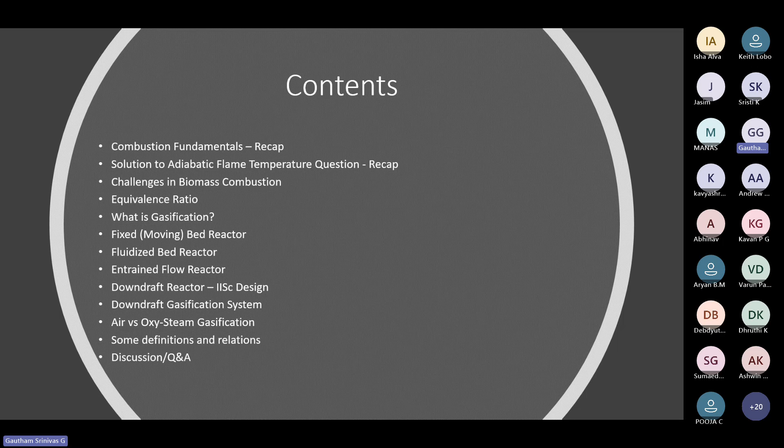And then there is a fixed bed downdraft reactor at IISc; we'll have a short intro to that one. Then the gasification system: the technology the reactor uses, and then the system. Then air gasification versus oxygen gasification, which I mentioned in passing when we saw the biomass conversion technologies and pathways. Then some definitions related to gasification, and then the discussion.

So for combustion, you need three major factors. One is the fuel or combustible substance. Then the oxidizer, which is air or oxygen; since air contains oxygen, air can be the oxidizer. And you need sufficient temperature for combustion to start and sustain. At room temperature you cannot have combustion, because each fuel has an ignition temperature, and you can start burning it only after reaching it.

So what is heating value? Heating value is the amount of heat or energy released when you burn any fuel. It can be determined through a device called a bomb calorimeter. There is an experiment for that; I didn't go into the details, you can look it up, also on YouTube. Heating value can be expressed as higher heating value or lower heating value. So what is the difference between the two? Anyone?

Sir, the water, H2O, that is released is either in gaseous form or liquid form. In higher heating value, we consider the water in liquid form, so the energy released by the water vapor converting back to the liquid state is also considered. In lower heating value, that part is not considered.

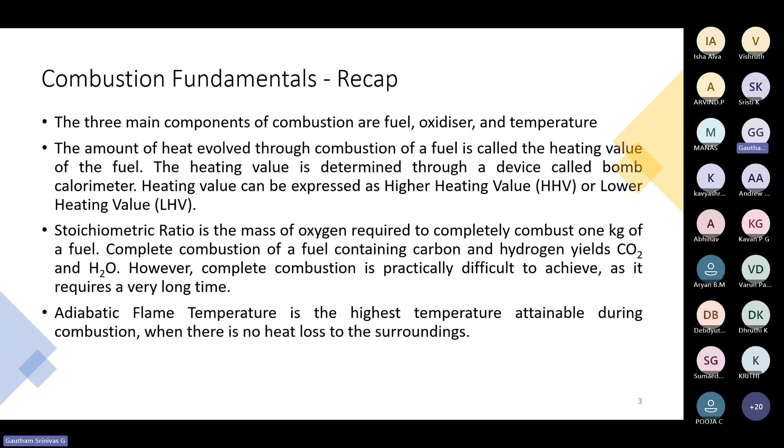Okay, so we'll come back to the problem from last week. So basically, we had considered only oxygen as the oxidizer. CH4 plus 2O2 gives CO2 plus 2H2O is what we had considered. That is okay if pure oxygen is the oxidizer, but in reality we will use air for the combustion. Air will contain nitrogen. So we'll see how to calculate in both cases. The first step is to write down the chemical reaction.

So if you have only oxygen as the oxidizer, you have this reaction which you have already written down. Or if you consider air, I think there is a mistake here. There should be a two. Oh, sorry, it's right. So if there is air as the oxidizer, then you have an extra 7.52 N2. Why? Because this is the average formula for air, if you remember from a couple of lectures ago. There is 79% nitrogen and 21% oxygen in air, so we represent that as 1 O2 and 3.76 N2.

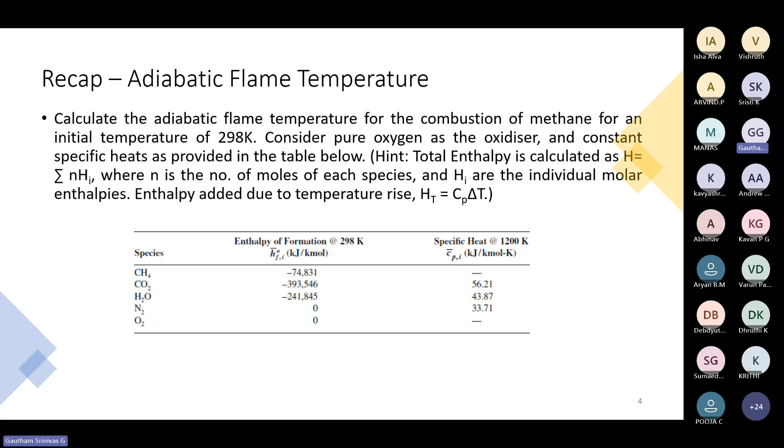So if you're using only oxygen, then this is what you will get. So this number times delta T, or you add 7.52 times 33.71 times delta T. Equate both of these to the number that you got. You don't have to carry the sign forward. Now calculate the delta T. You just have to divide this by this number, right?

So the delta T, if you are using pure oxygen, is 5574 Kelvin as per these numbers, which is very high, right? It's about 5200 something degrees Celsius, which is quite high. But if you use air, it is about 2018 Kelvin. So that's about 1700 something degrees Celsius.

Now, the delta T is nothing but the adiabatic temperature minus the initial temperature, because the adiabatic temperature is the final temperature that you are supposed to calculate. You know the initial temperature, which is given over here, 298 Kelvin. So now you just have to add this number to the initial temperature, and you get the adiabatic flame temperature for the case of oxygen and for air.

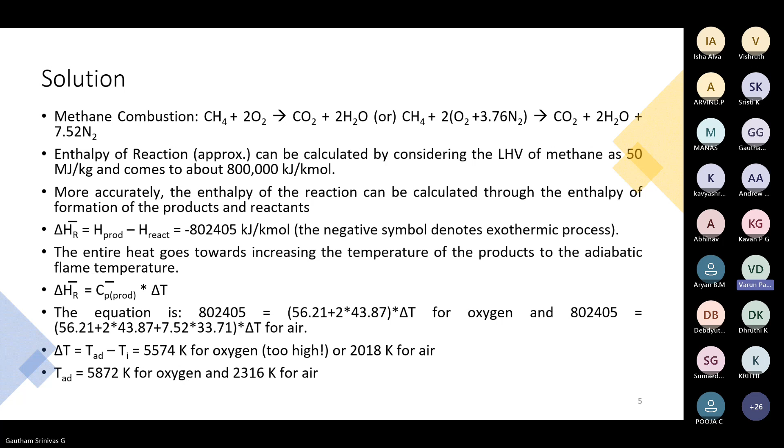Okay. Yes, sir. Okay. So moving forward, coming to biomass combustion now. We spoke about combustion in the previous lecture. Now let's see what are the challenges in biomass combustion.

Like I said, NOx formation is possible. Because you have an adiabatic flame temperature of above 1500 degrees Celsius, the nitrogen in the air will react with the oxygen in the air to form NOx. Okay. Anything? Okay. So the nitrogen and oxygen will react to form NOx. And NOx is a pollutant. It causes a lot of respiratory issues and everything. Then there's also particulate matter due to the ash content in the biomass.

So according to the life cycle assessment, around 74% of all environmental impacts arising from wood combustion is attributed solely to NOx and particulate matter, NOx and PM10. Only 2% is attributable to CO2, and that also comes because of the transportation of the wood and the other processes, not due to the wood combustion itself. Why is that so?

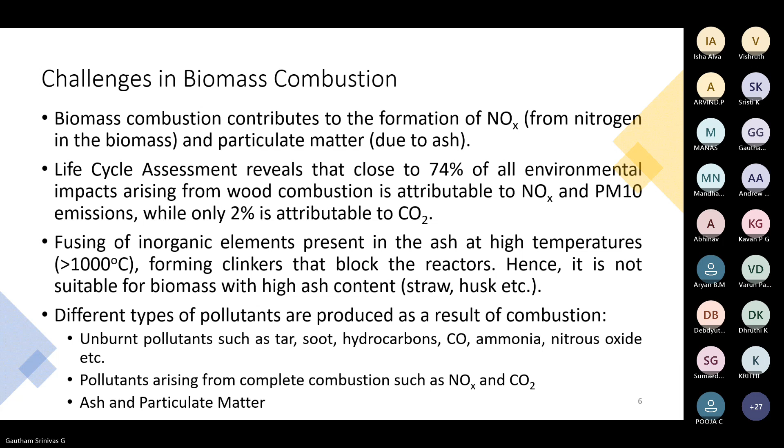So coming to the equivalence ratio. There is a stoichiometric air requirement or stoichiometric oxygen requirement. It is the mass of oxygen or air required to completely combust 1 kg of biomass or any fuel. Let's take that as X. So let's say I have a biomass that ideally requires X amount of oxygen for complete combustion.

Now I can give more than X, less than X, exactly X, or zero. You get the point. I require X amount of oxygen to completely combust 1 kg of biomass. I say I'll give 2X amount of oxygen. So if I require X and I give the system 2X, what is that process called?

Are you sure? Combustion. Yeah, exactly. So if I require x and I'm giving more oxygen than required, what is that process? It's combustion, right? What is gasification? Gasification is if I give less than x. If I say that I require x amount of oxygen, but I will give only 0.3 times x, then that is gasification. And what happens if I give no oxygen? If x equals zero, if I give 0 times x? Pyrolysis, sir. Yes, exactly. Okay.

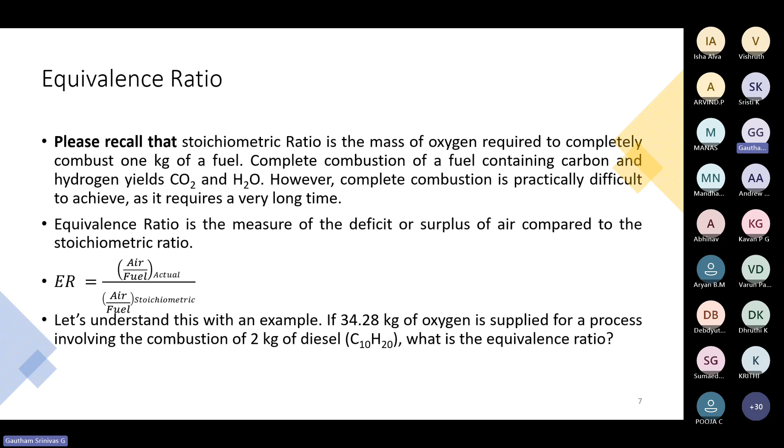So now let's go into gasification. So why is equivalence ratio important for gasification? Because that kind of tells you which zone you are in, what process you are following. Are you going for gasification, combustion, or pyrolysis? Or are you going for excess oxygen? So over here, let's look at what is gasification, then we'll come to this picture.

Okay, so gasification is the process by which a gaseous fuel is generated from solid carbonaceous fuel, like coal, biomass, or municipal solid waste. That gaseous fuel can be syngas or producer gas. The difference between the two I'll cover a little later. I've already told you this, I think, in the first or second lecture.

So gasification is sub-stoichiometric because you have a stoichiometric air requirement for combustion, and you're going below the stoichiometric air requirement. So it's called a sub-stoichiometric combustion process. And it is a combination of oxidative pyrolysis and char reduction reactions. This also I will explain. So what is oxidative pyrolysis?

You have pyrolysis taking place within the reactor. During gasification, you still have one portion where pyrolysis takes place. The volatiles are removed. The char that is produced and the volatile gases that are released are further oxidized because of the supply of oxygen within the reactor. They are not completely oxidized, not completely burnt, because the air is in limited quantity.

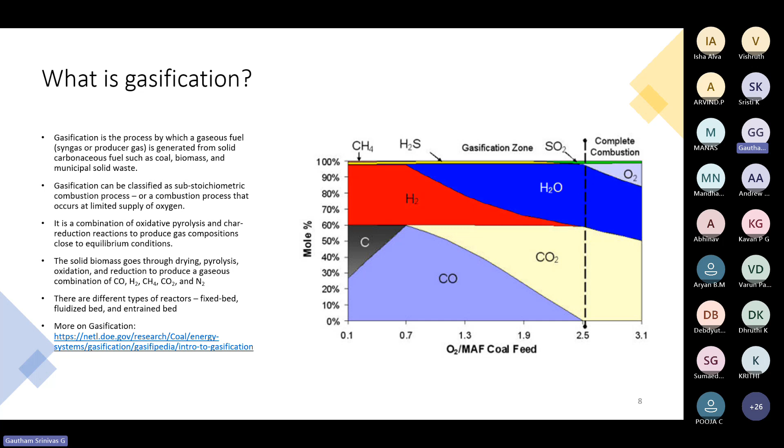Did you get this? Wait 1 second.

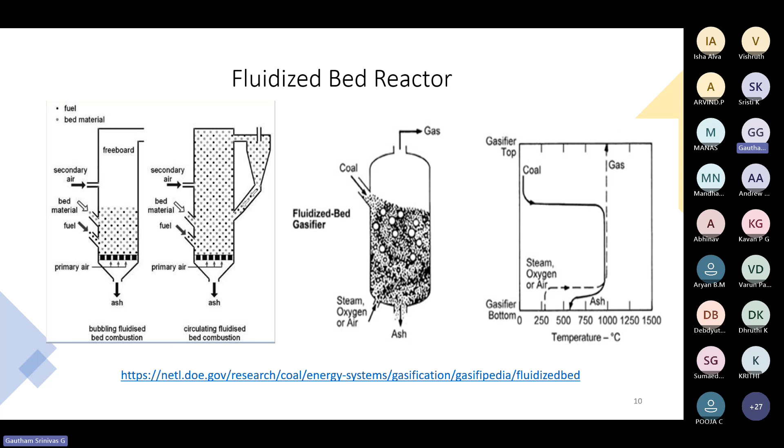The entrained flow reactor is very similar to fluidized bed, but there is no fluidization as such. In this case, the fuel and the oxygen are moving side by side. Here, both the fuel and the oxygen are introduced from the top. The fuel is again pulverized in this case, but the oxygen entraps the entire fuel into it, and then it converts the fuel into gas.

The only difference between this and the fluidized bed reactor is, I mean, in both cases, the biomass or the fuel has to be pulverized.

The entrained flow reactors operate at very high temperatures and pressure, and the gasification reactions occur at very high rates. Because of the high temperature, if there is any tar formation, the higher hydrocarbons and unwanted oils forming within the reactor, which may clog the engines or whatever equipment you're using downstream, have to be cracked within the reactor. So because of the high temperature, these tar particles are cracked within the reactor.

And the temperature inside is so high that the ash first fuses into clinker. I told you about clinker formations. They are fused into clinker, but the temperature is even higher, so it actually melts. The ash melts, and it's collected in the form of a slag down here.

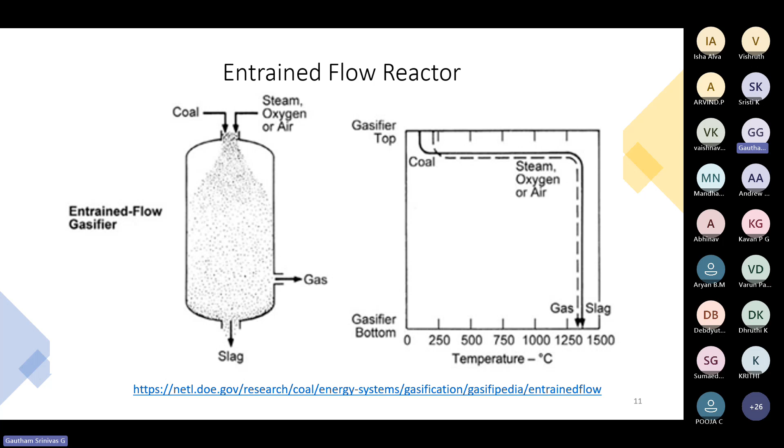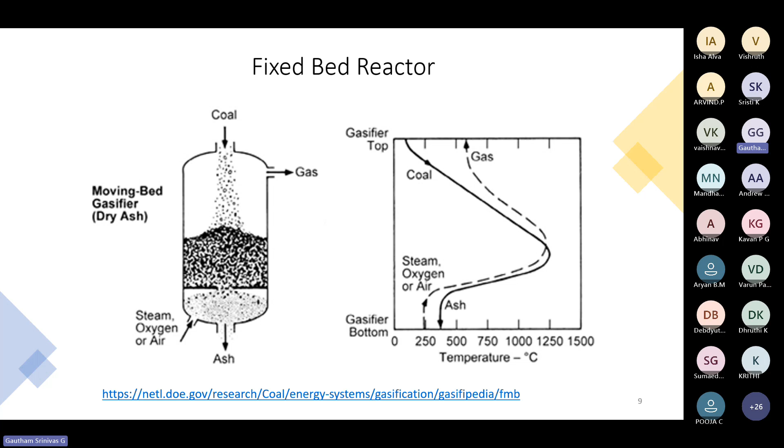So there are some advantages and disadvantages with each type of reactor. The fixed bed reactor normally has high tar yields if it is an updraft reactor. What is updraft? This one is updraft because the gas flows from down to up. If the gas flows from up to down, that's called a downdraft reactor. Of course, the one major drawback with the fixed type is scale limitations. You cannot scale it up, so you need small scale reactors, for both updraft and downdraft types.

And normally you can produce very high heating value gas in fluidized bed and entrained bed, whereas in fixed bed you cannot do that. The heating value of the gas is very low.

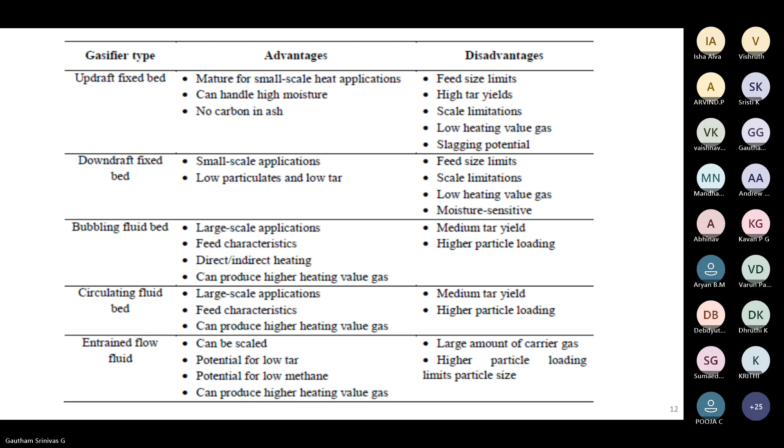So this one is the open top downdraft reactor. It's a fixed bed reactor, downdraft type, because the gas is moving from top to bottom. The reactor has four zones, similar to the reactor I explained earlier. The biomass is fed from the top. And if you're using air as the oxidizer, since it's open top and the lid is open, the air is also coming from the top. On the top you have the drying zone, about 25 to 250 degrees Celsius.

The moisture is released, and the moisture in the form of vapor travels along with the biomass and the air. Then comes the pyrolysis zone, about 250 to 700 degrees Celsius, where char, biochar, is formed, and you have the various tars as well as volatiles. They're all traveling down. Now comes the oxidation.

Here you have limited supply of oxygen going in. Whatever supply of oxygen is there, you're dividing it among the top and the nozzles, maybe 65% from the top and 35% from the nozzle. So you have the oxidation zone here because of the presence of oxygen in this vicinity. The char gets converted into CO and CO2, and the hydrogen in the volatiles gets converted into H2O and so on.

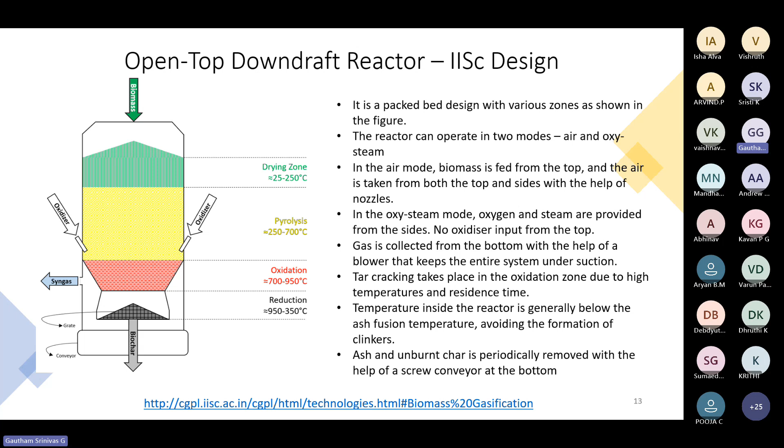So this is the entire system. Is this clear, or do you need me to increase the size or something? Yes, sir, it is clear. Clear, right? Okay. So this is the system.

So we just send the biomass over here, and there's a conveyor, a hopper, which travels to the bin, and then it drops the biomass. This is pneumatically operated. And this is the reactor that I just explained. You have the screw conveyor over here collecting the char and the ash. The syngas, or the producer gas, goes to a cyclone to clean it further of all the particulate matter. The particulate matter is collected in a bin over here, and the syngas travels further.

So this setup that you see is a set of scrubbers. So what are these scrubbers? You have atomized water on top, so it sprays water on the gas. A few things happen. One is, if there are any solid particles left over in the gas, they get entrapped in the water, and then they travel down because they become heavy, and they are collected in this tank.

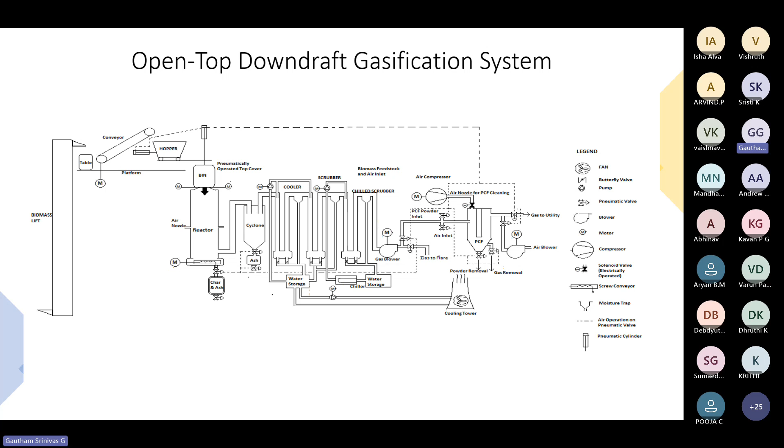Yeah. So now we come to the air versus oxygen steam gasification. In air gasification, air is used as the oxidizer, whereas in oxygen steam gasification, you use oxygen and steam. Oxygen is the main oxidizer, but superheated steam is added to enhance the water gas reaction. And this is done to enrich the syngas.

I mean, if you want more hydrogen content in your gas, then this is done, because it is H2O, right? And the steam reacts with the carbon within the reactor to form more hydrogen. So you use more steam to produce more hydrogen. Okay. Air gasification has lower investment and operating costs, but oxy-steam has high investment and operating costs. Can someone tell me why?

Because we have to get oxygen separately. We have to get oxygen from air. That's why that process is costly. Yeah, that is one. What about the other? Any other reason you can think of? That is also an energy intensive process, right? Of course, that is energy intensive, but assume that you are purchasing oxygen from outside. So that comes under your investment cost. So it is not operating. Okay, no, it is operating, of course, but

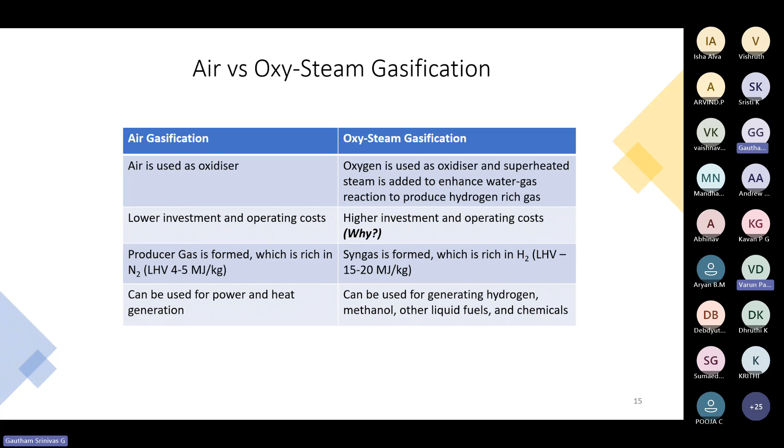That is one thing. The other thing is because of the presence of nitrogen in producer gas. Okay. The producer gas has nitrogen. It is incredibly hard to separate the hydrogen when there is a large amount of nitrogen present. Whereas in the case of syngas, there is no nitrogen present. You can easily separate it. Yes. Okay. So that is the reason.

So some definitions, I'll tell you. Flame propagation rate. The flame starts at the oxidation zone because that's where most of the oxygen is concentrated, and the flame moves slowly upwards into the other zone. So the rate at which the flame front moves up in the reactor is called the flame propagation rate. It's measured in millimeter per second.

Then one very important definition is steam to biomass ratio. So if you're going for oxy-steam gasification, there are two things. One is the equivalence ratio, which we already saw. So in oxy-steam gasification there are two things here: oxygen and steam. Oxygen is governed by the equivalence ratio. The steam is governed by the steam to biomass ratio. It is the amount of steam utilized for the biomass feed.

That is, if you're using, let's say, 10 kgs of steam for 5 kgs of biomass, then your SBR is 2, because for 1 kg of biomass, you're using 2 kgs of steam. So how many kgs of steam have you used per kg of biomass? So that is SBR.

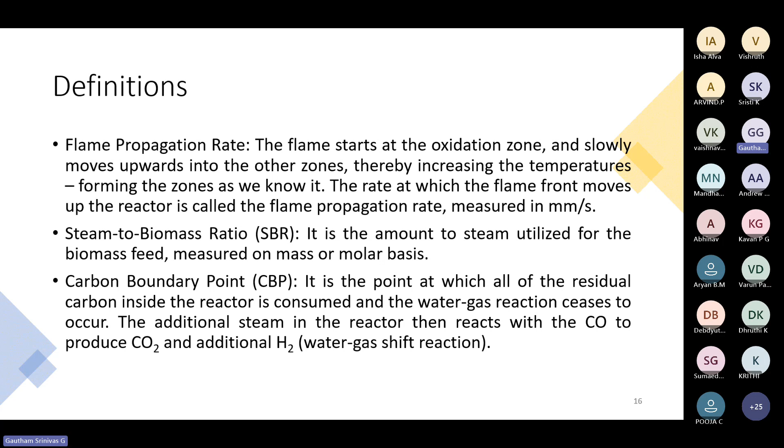Because in SBR, we are actually providing more steam to it, which is water. And in ER, we are considering oxygen. So more the oxygen, more water is formed. Exactly. When steam is given, it will produce more H2.